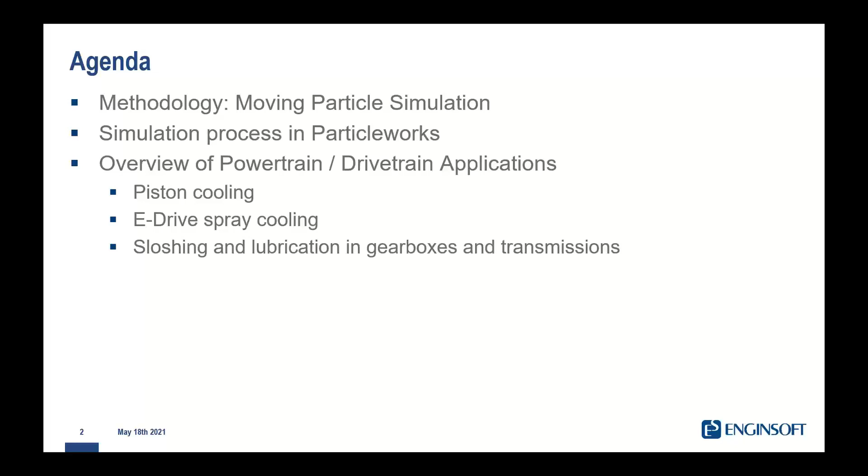I will take you through a brief technical introduction about the moving particle simulation. Then afterwards, how the simulation process in Particleworks is designed. So Particleworks is a commercial tool using the moving particle simulation. And then finally, before passing the word to Tobias Moll, I will give you an overview about some reference applications from the powertrain, or broader speaking, from the drivetrain sector, based on customer references that have been presented on other conferences before. So jumping into the first topic.

So the moving particle simulation was originally proposed in 1996 by Professor Koshizuka. Professor Koshizuka is a professor at the Graduate School of Engineering at the University of Tokyo, and also a co-founder of Prometech Software. So what is the MPS? Basically speaking, in one sentence, the MPS is a deterministic Lagrangian method to simulate liquids. But what does that specifically mean?

So starting from classical CFD methods, such as the finite volume method, the fluid is normally discretized on a numerical grid, where basically mass and momentum is exchanged between the different cells, and this concept is called an Eulerian approach. And then on the other hand, the basic idea of the moving particle simulation, instead of passing the mass and the momentum between the cells, is to discretize our fluid, our liquid, by a set of particles that interact with each other and also move.

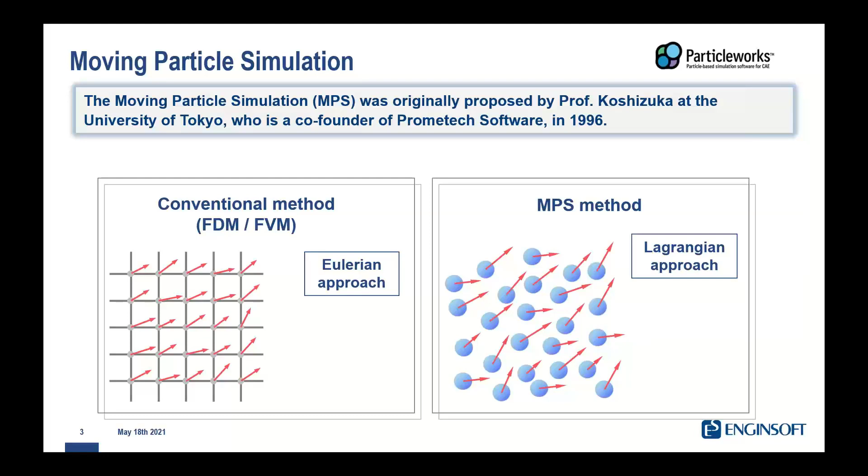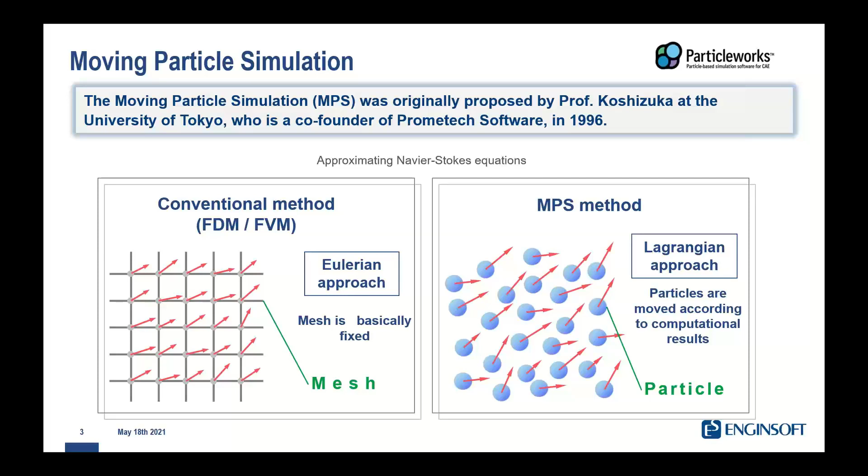So we can basically see them as dynamic calculation points that do not exchange mass, and this on the numerical side already makes life much easier. And the MPS also approximates the Navier-Stokes equations. So how to describe Particleworks, which is a commercially available tool by Prometech Software that uses the moving particle simulation. So Particleworks is a CFD software based on the MPS, and it solves the Navier-Stokes equations in incompressible condition.

So that means that it's mainly applicable to liquid flow simulation, and it's commonly used to simulate free surface flows, but also liquid jets. But it can also simulate granular material like powder and also rigid floating objects. And these two examples we see here are the oil splashing in a transmission, and also on the right-hand side, a bearing with grease, which means that in principle we can also simulate highly viscous, or in that case actually quasi-solid materials.

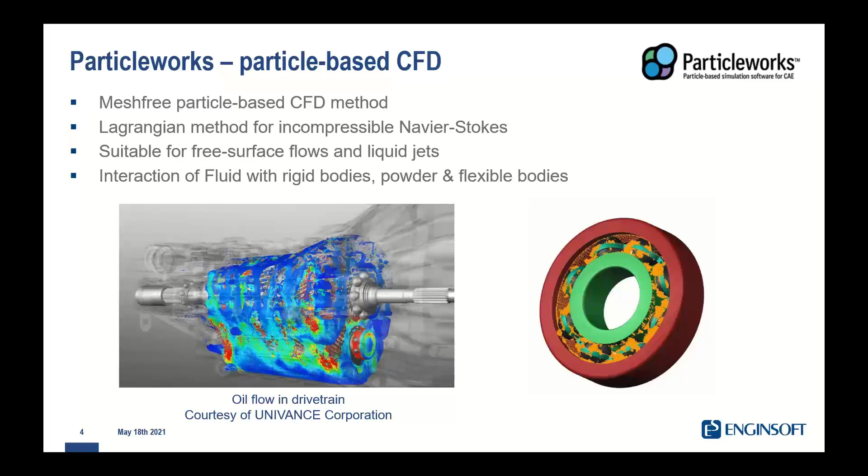So how does the general simulation process in Particleworks look like? It starts that we export our geometry data from CAD. In here, it's fine enough to just roughly group the different bodies based on the kinematic conditions that we want to implement later on in our simulation model. So for this two-speed reduction gearbox, we'd import the housing, the input shaft, the output shaft, and then one file per other rotating component, which in that case would be the different gears.

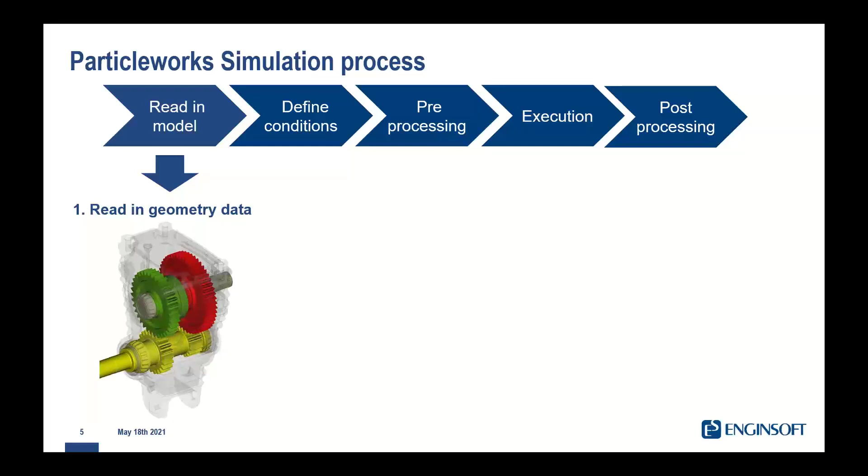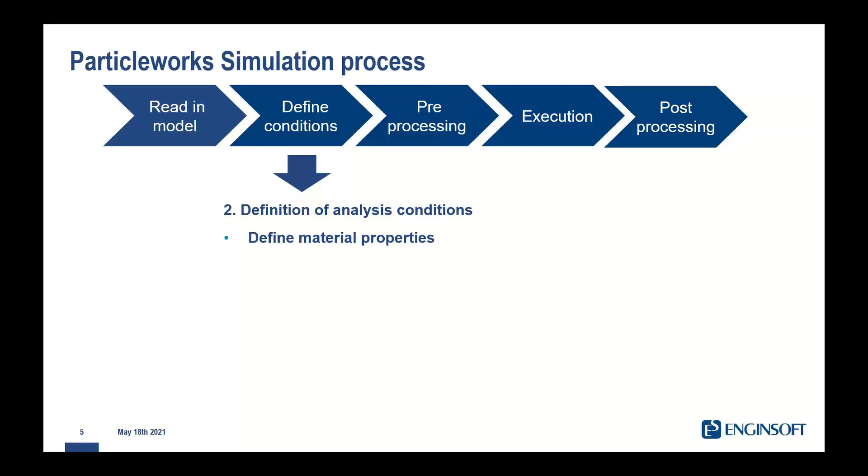Then after importing the model, we'd define the analysis conditions. So this starts with defining our material properties, specifically speaking, in that case, the oil properties being characterized by the density, viscosity, the surface tension, and all these kind of parameters that characterize our liquid. Then in the next step, we can predefine the kinematics of our system. So for the application of a gearbox, that would mean that we define the rotational velocities of the different shafts and gears.

And then in that step, last but not least, to introduce our liquid particles into the simulation, we could either use inflows and outflows, or if we have a pre-filled sump, for example, we can also use this sort of filling plane, which will pre-fill the sump based on the filling height or a predefined volume, and then also, of course, set some numerical parameters for the solver.

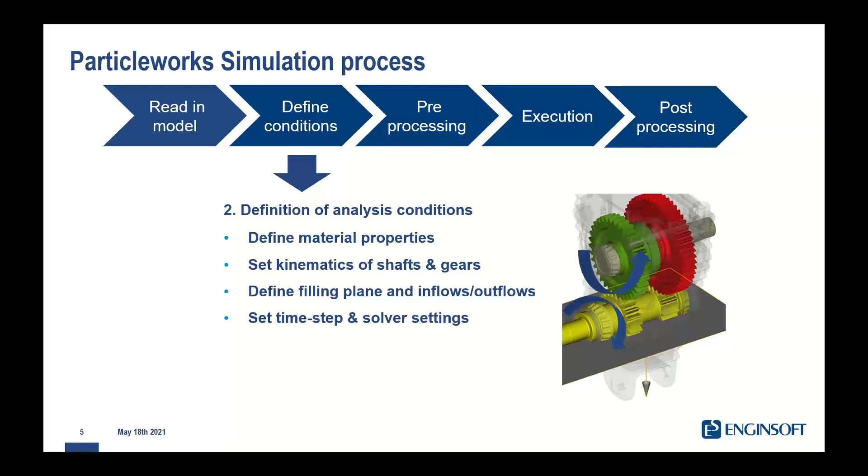Then transitioning to the pre-processing, this is a fully automated process in Particleworks, which in the end translates the geometry into the internal calculation model that the solver will actually use, but also produce our initial particle placement. So before running the actual simulation, we will already see the amount of fluid being filled into our system.

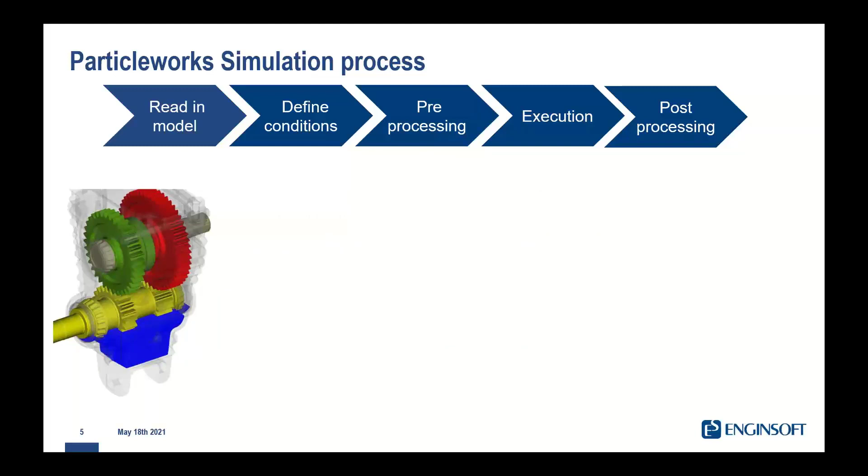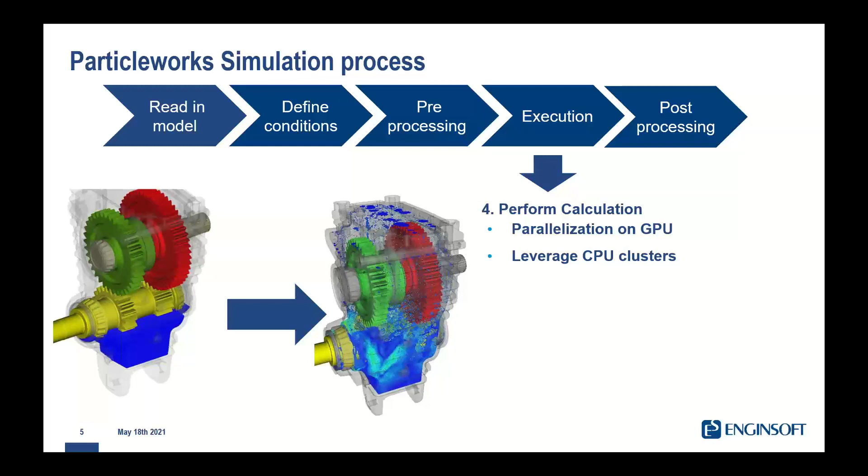Then during the actual calculation, we can leverage NVIDIA-based CUDA GPUs. So there is a GPU-based solver available, which makes a lot of sense for particle-based methods in general, but we can also leverage existing CPU clusters. And from the software point of view, both the user interface as well as the solver run on Windows and on Linux.

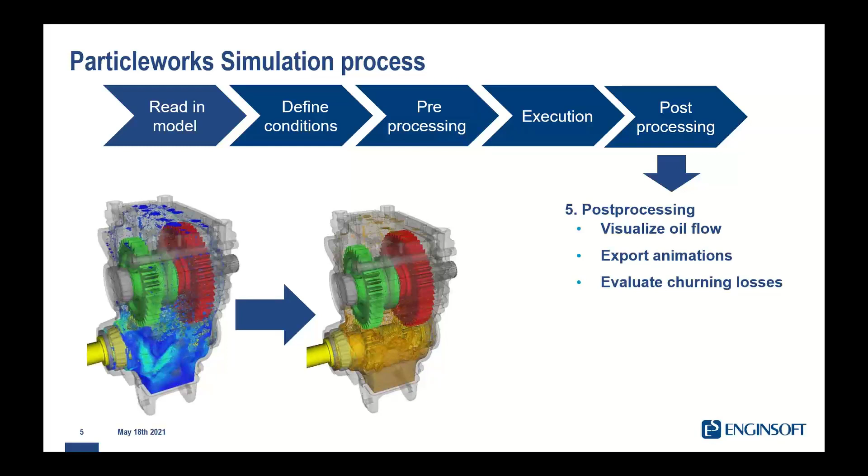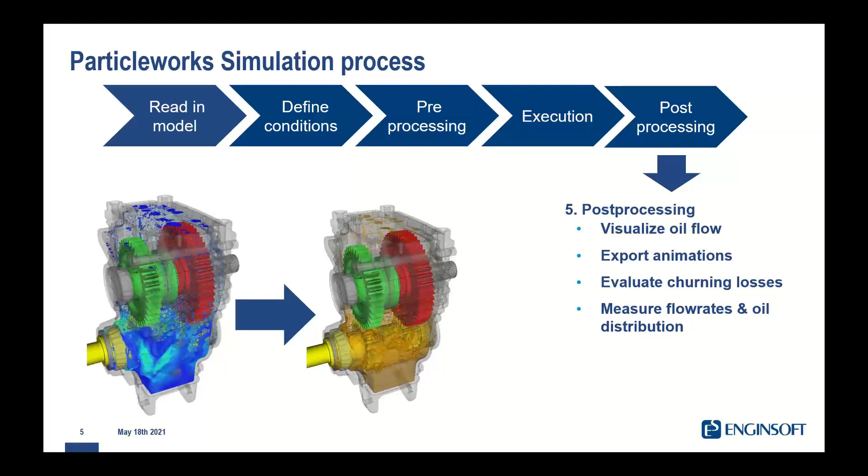And then transitioning to the last step, the post-processing. In there, of course, we can visualize the oil flow, we can export animations, as we will later see, evaluate the churning losses, but also perform virtual measurements, so to evaluate flow rates and also the oil distribution for different parts of our system.

So cut down, what's the advantage of the simulation process? Since meshing is being taken out of the equation in comparison to mesh-based CFD, this saves us a lot of time. Then the state-of-the-art GPU-based solver gives us a huge advantage. And in terms of simulation process robustness, it's also very easy to implement complex kinematics.

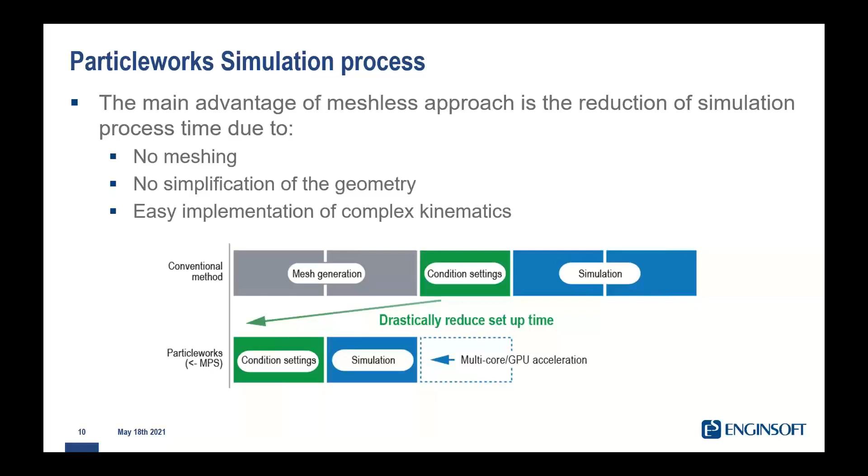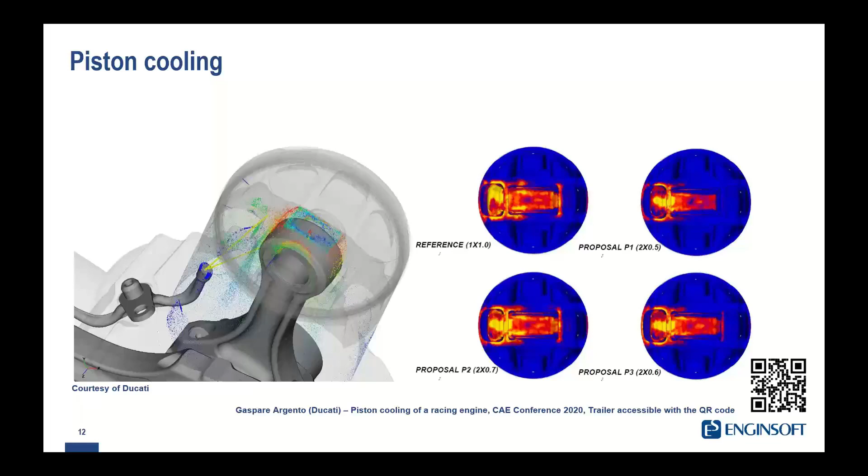So the first application I'd like to focus on is piston cooling. In here at the last CAE conference, we had a very nice presentation from Ducati Corse. The recording of that presentation is still available on the homepage of the CAE conference. And in there, Ducati presented their use case on how Particleworks helped them to evaluate and also optimize the effect of different nozzle designs for the spray pattern on the undercrown of the piston, and also evaluate and therefore optimize the HTC distribution on the undercrown of the piston.

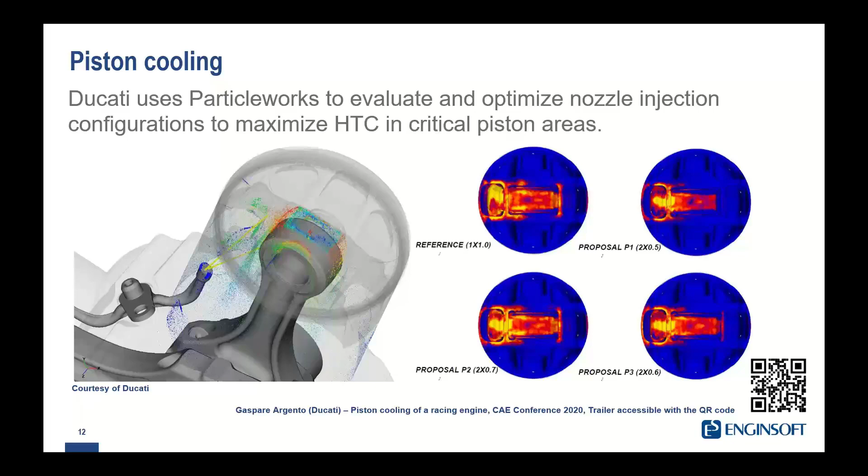Then another case study, which was presented in collaboration between EnginSoft and Ricardo, focused on the thermal effects of an electric motor. In there, the overall target of the application was to compare the results of simulations with experimental measurements, so temperature measurements from the test bench with simulated temperatures from an FE model.

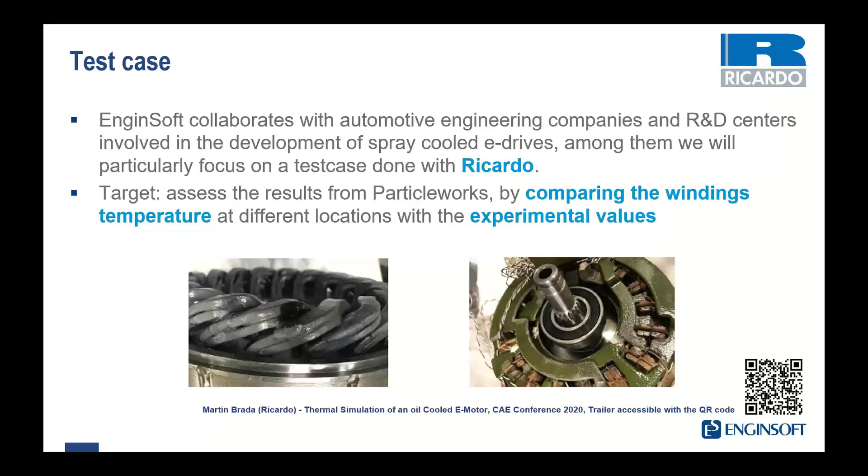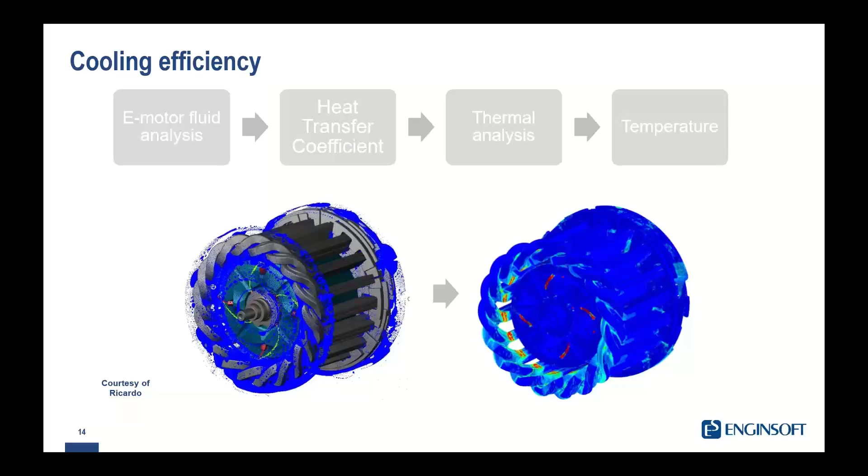And in there, Particleworks was used to simulate the windage, so the airflow inside of the e-motor, but then also the oil distribution and also the HTC distribution on the windings, which were then used in a later stage to calculate the temperature distribution in the windings. And finally, the temperatures were compared between the resulting temperatures from the simulations and from the measurements.

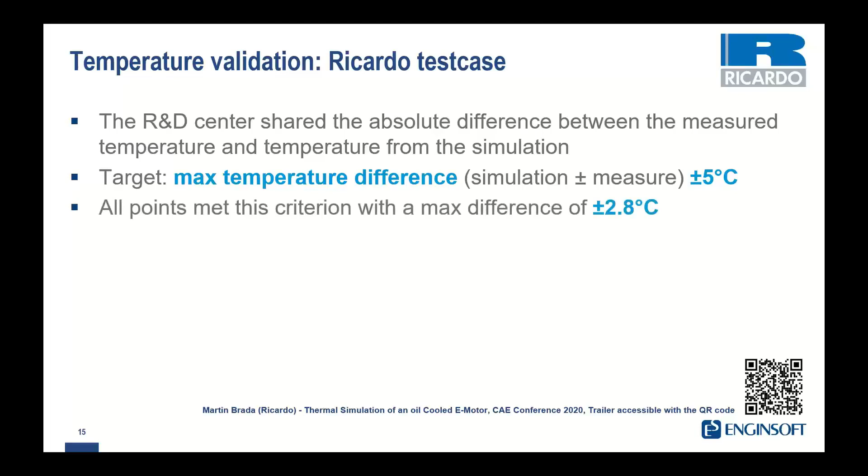In there, the overall requirement was to lie within a deviation of less than 5 degrees Celsius. And lastly, this criterion could be met with a difference of less than 3 degrees Celsius. And also here, the original talk is still available at the homepage of the CAE conference.

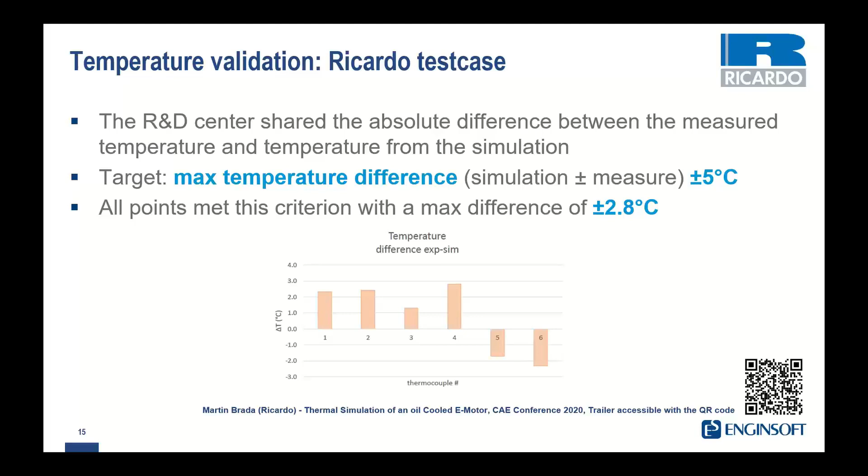Now, shifting a little bit more into the gearbox or transmission sector. It's one of the sectors where Particleworks is very broadly being used by major players. This case study that I'd like to briefly talk you through was presented at the CAE conference 2016 by Comer Industries. In here, we have a 2-speed reduction gearbox from a harvester machine, and the initial question was whether it is possible to have the model and the simulation done in roughly 3 days, which could be done in the end.

And in here, initially, the oil flow was validated based on these characteristic patterns that could be identified at the top of the housing. And then Particleworks was used to evaluate the lubrication, which was led by these internal channels to the bearings. And finally, this project could help to investigate the effect of the initial oil level onto the lubrication.

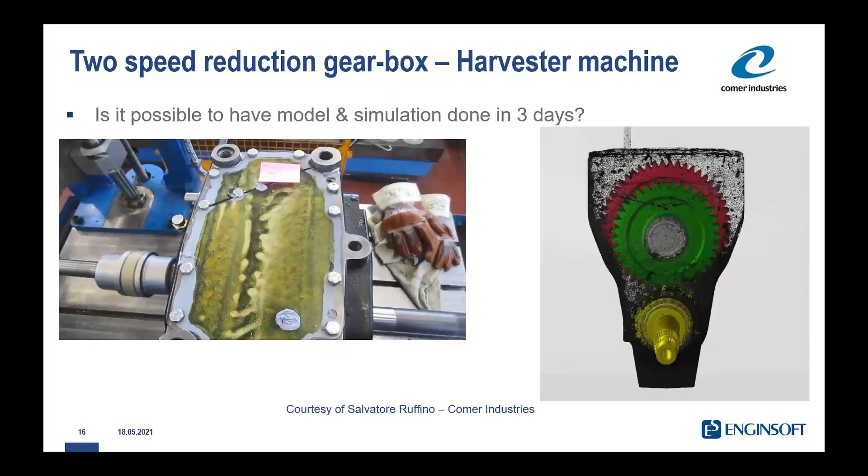Then another very interesting application from Hewland was regarding the positioning of the scavenge port. So in here, we could also simulate the circulation of oil inside of a transmission and also see the sloshing behavior in the transmission due to dynamic driving conditions, and therefore also validate that the pump intake is always well fed with oil.

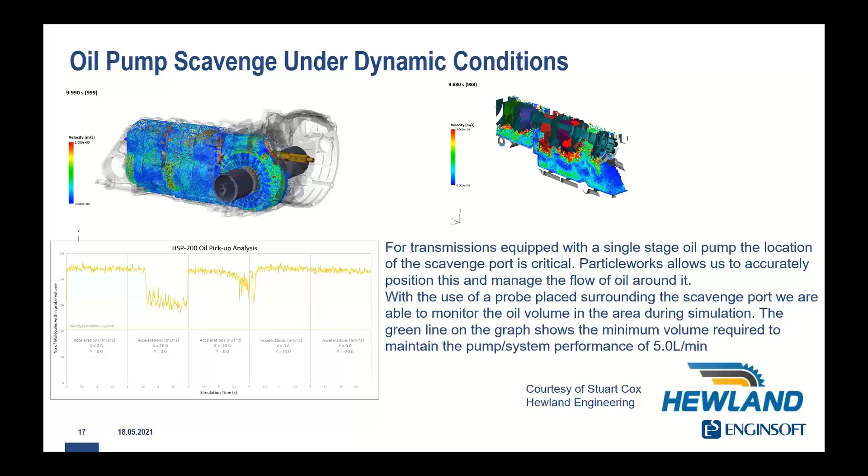We cannot hear you anymore. Your audio is off. Oh, sorry. There you go. Now you're back. Okay, yes. Sorry. Welcome from my side. I was muted, unfortunately. Now I would like to show some application of the software Particleworks.

And first of all, I would like to begin with a brief introduction of the Institute for Combustion Engines at RWTH Aachen University, where I work. So the structure of the institute: we have one director, that is Professor Stefan Pischinger. We have a junior professor, Professor Jakob Andert. He is Professor for Mechatronic Systems for ICE. We have 3 chief engineers and overall a bit more than 300 employees, which distribute almost equally to scientific employees, non-scientific employees, and student workers.

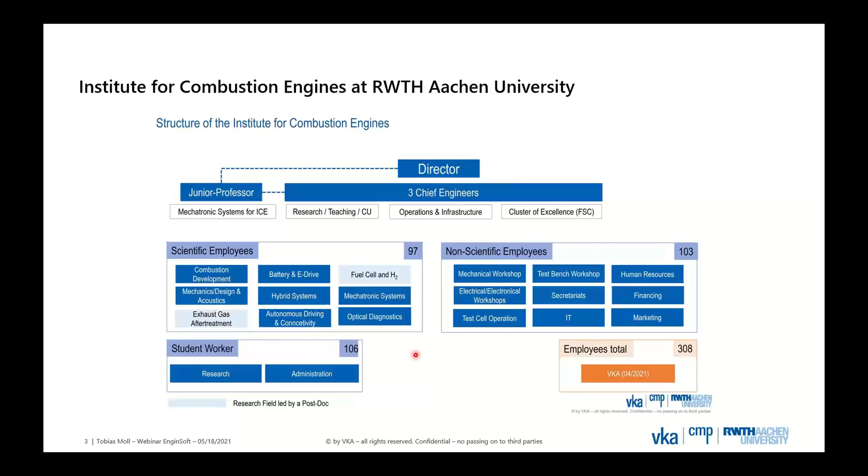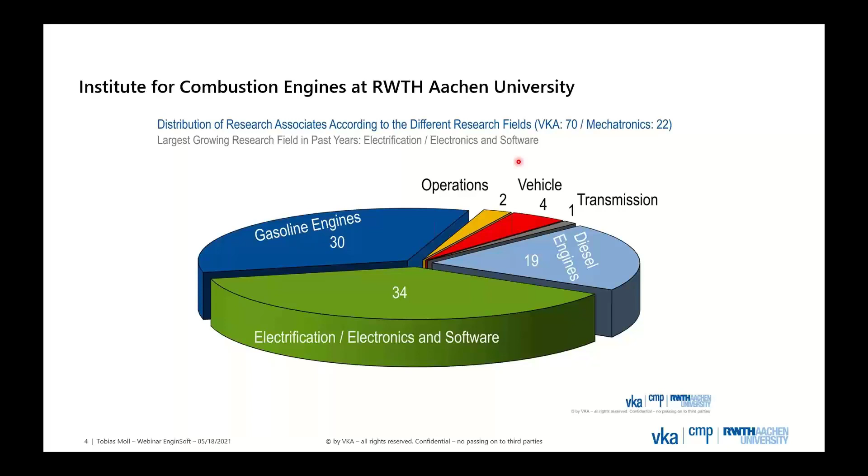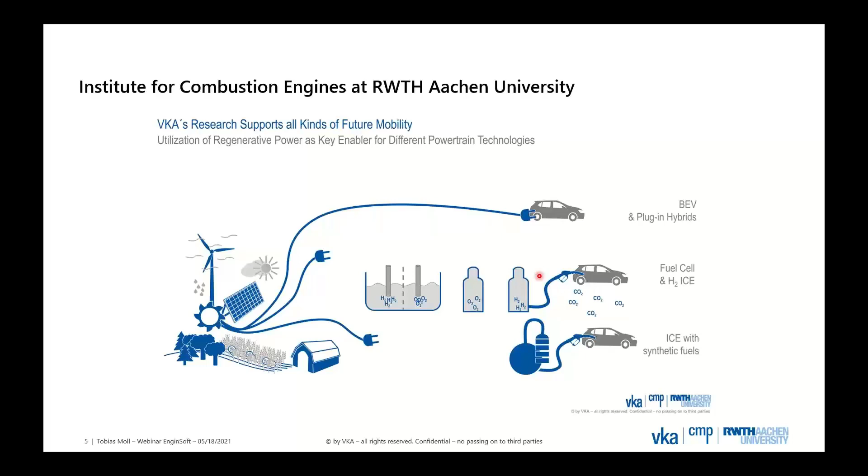So that was the introduction to the Institute, and now I want to give the background and the overview of the internal research project for transmission losses. So the research project, which is actually my PhD work, is about a co-simulation of efficiency, lubrication, and heat management for transmissions with integrated electric machine. So this is an exemplary setup of a co-simulation, in this case for a hybridized dual clutch transmission.

So the idea is to have one model, in this case I use GT Suite, where I have a thermal network of the transmission and also one longitudinal dynamics model included. And I have one model for the simulation of the transmission losses. This I do in MATLAB Simulink. And you see here on the left side, in this transmission, we have an oil sump. You see in yellow, orange here, the oil volume flow. We have an oil sump and an oil pump, oil cooler. And with this oil pump, oil is pumped to an electric machine, which is integrated, to cool the electric machine.

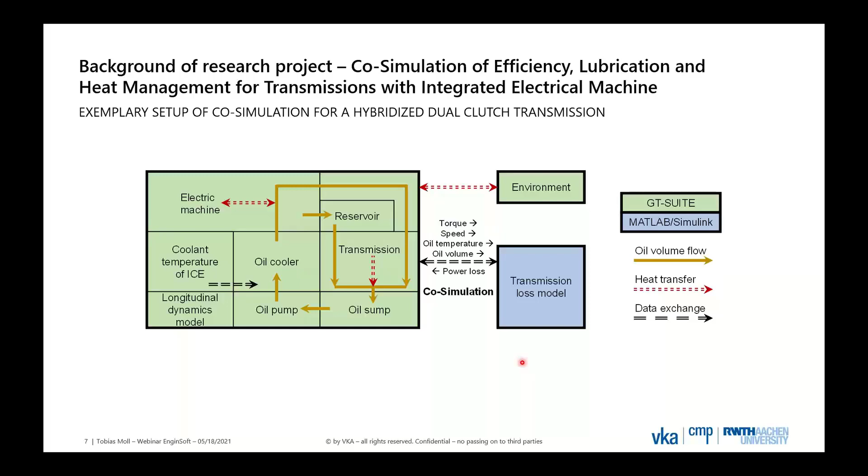And of course, it's important to simulate the losses as accurately as possible. And because of that, we did an internal project to validate the MATLAB Simulink model. This internal research project was done at FEV Europe GmbH. The Institute for Combustion Engines has a research cooperation with FEV.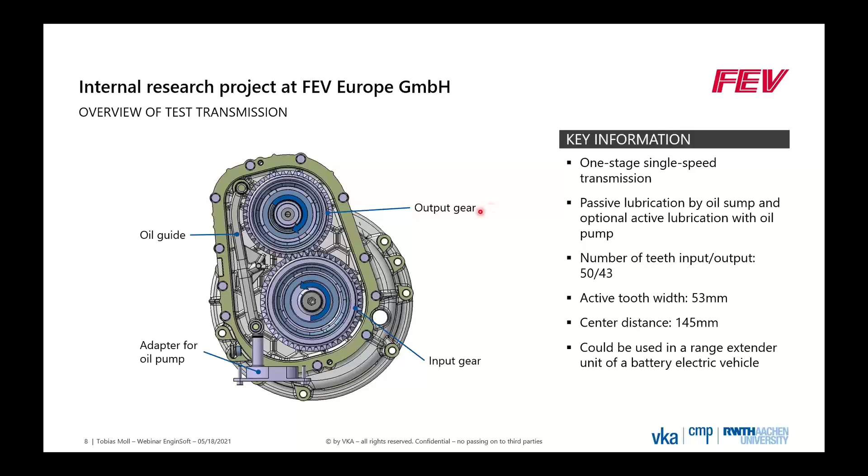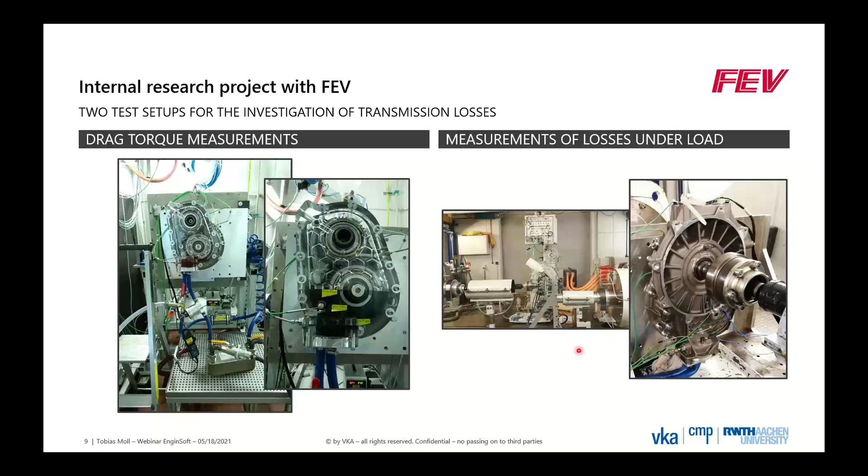And here on the right side, you see the other test setup for the measurements of losses under load. So with the full aluminum housing, and 2 e-machines, one at the input, one at the output. There we also measured the torques and could calculate efficiencies. Now here you see it a little bit larger.

So we investigated 3 different oil levels for these drag torque measurements. The low oil level, where just one tooth head is dipped into the oil. Then a medium oil level, where the bearing is just dipped into the oil, and the higher oil level, where we go up to the axis of the lower gear. Furthermore, we investigated 3 different oils, 3 different viscosities. But I will come to that later.

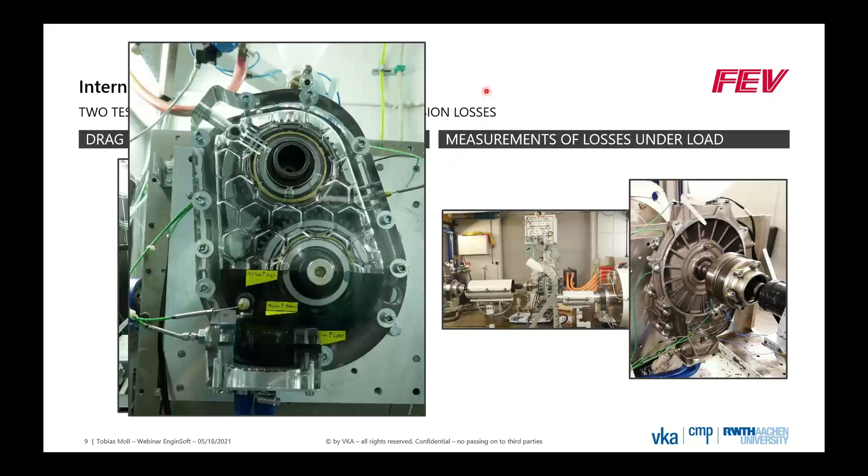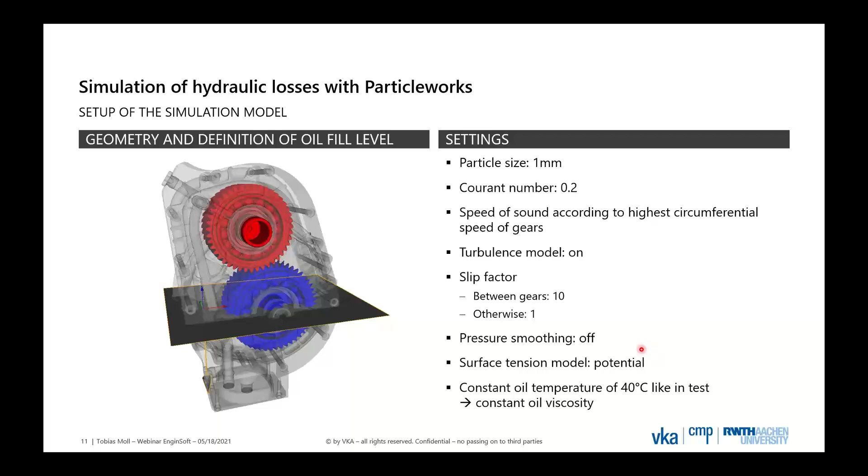For the slip factor, I used a value of 10 between the gears, and otherwise, between oil and housing, I used a slip factor of 1. With this slip factor, I saw better results, and I could simulate the squeezing losses more accurately. The pressure smoothing was switched off. The surface tension model was potential, and as I said, a constant oil temperature of 40 degrees, like in the test. So also in the simulation, a constant oil viscosity.

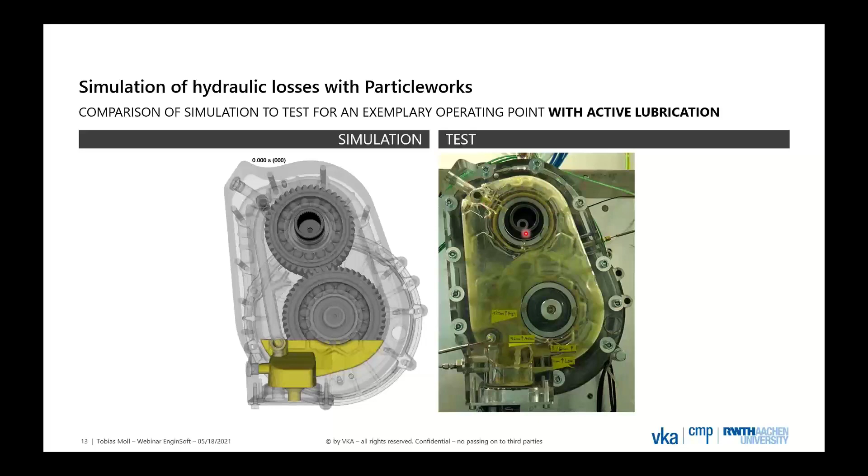Even though it may not look so compared to the other picture, without active lubrication we only have some oil mist around the bearing. But here with active lubrication, we really have an oil film in this region. Here you see the video from the test to show you the dynamic of this.

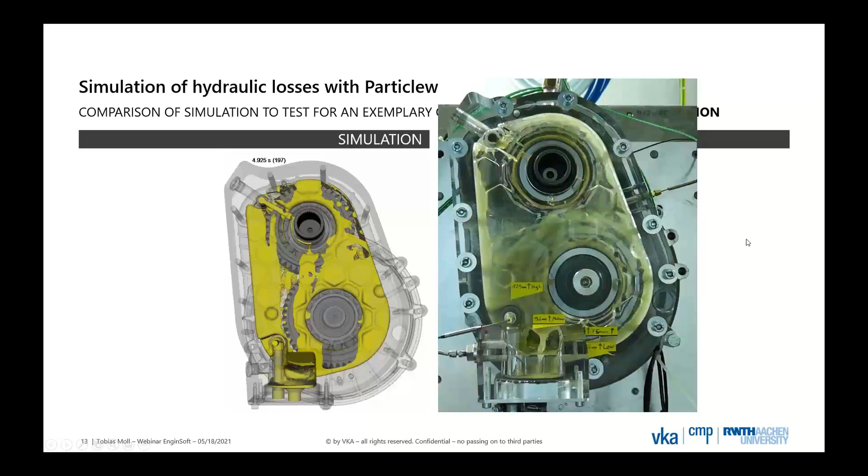I know it works. So you can see some seconds of this test. Even in the stationary state, there's a lot happening. There's always movement, so it's not a constant oil flow. There's always some action inside this transmission. And this is only for 1000 RPM. For the higher speeds, of course, you see oil almost everywhere. But still nice to see.

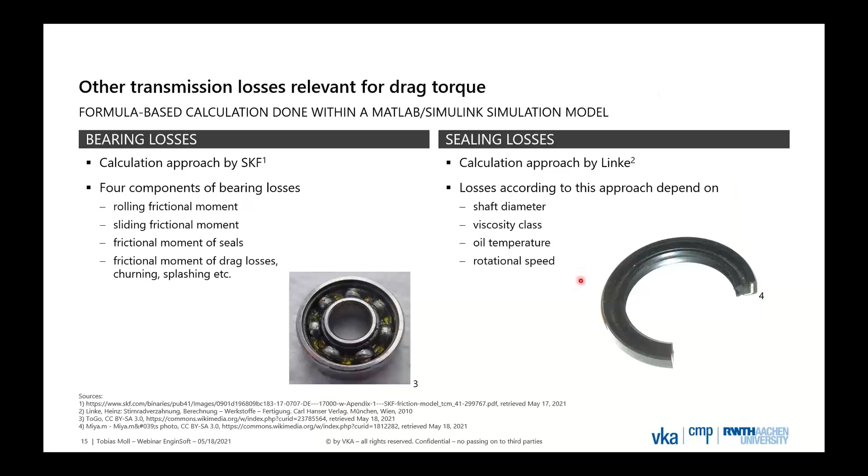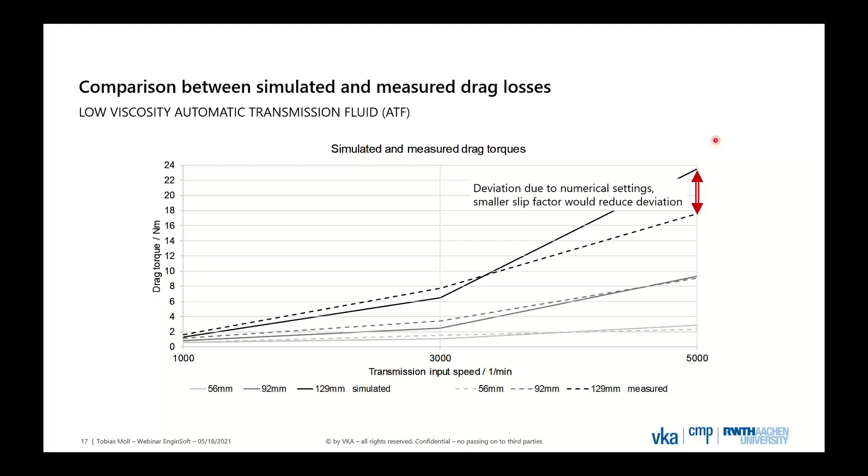But for these investigations, I kept this as a constant value. So that could be improved in this case with the experience that you gain, for example, in a test.

Here you can see the relative deviations of simulated to measured drag torques. On the horizontal axis, we have the speed and the oil level, and on the vertical axis, the deviation. You see that in most of the areas we are below 20% deviation, and in the remaining areas, still between 20 and 40%.

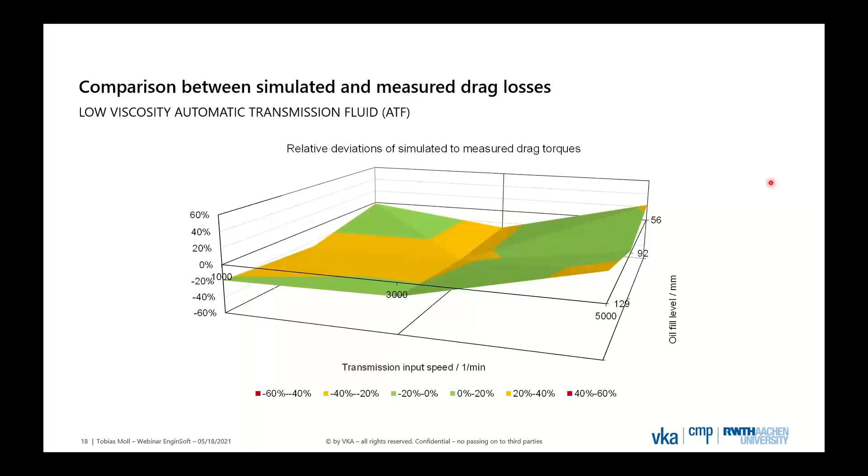So on this slide, you see, as an example, how the single losses distribute. For this ATF oil, we have here the values for the low oil level and 1000 RPM. The left bar is always for the tests and right for the simulation. You see, quite good result. And the biggest part of these losses actually come from the sealing losses, at least according to the simulation.

So when we go to a higher speed and keep the oil level at the low oil level, we see the sealing losses here in green do not change. So what changes is mainly the hydraulic losses, and the bearing losses actually reduce quite a little bit.

And the third example, where we also have a very good simulation result compared to the test. So we increase the oil level to the medium oil level. So the hydraulic losses really increase very much. Also the sealing losses, they are not influenced by the oil level, and bearing losses also increase due to splashing losses.

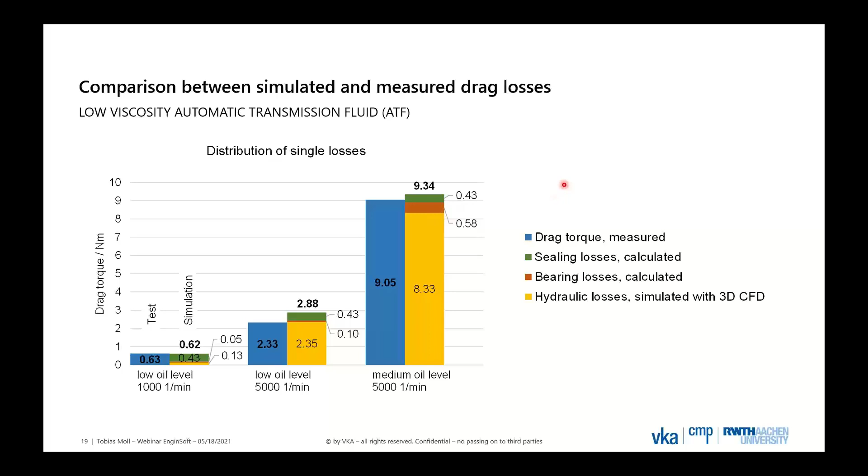So then we have the medium viscosity that has been investigated. This was a 75W-80 transmission oil. The same representation as before. Here it's a bit different. Here we underestimate the measured losses in our simulation for this operating point at 5000 RPM and the high oil level. But this can be explained by the oil aeration, which was also noticeable in the test. This leads to an increased viscosity, but the oil aeration was not considered in this simulation.

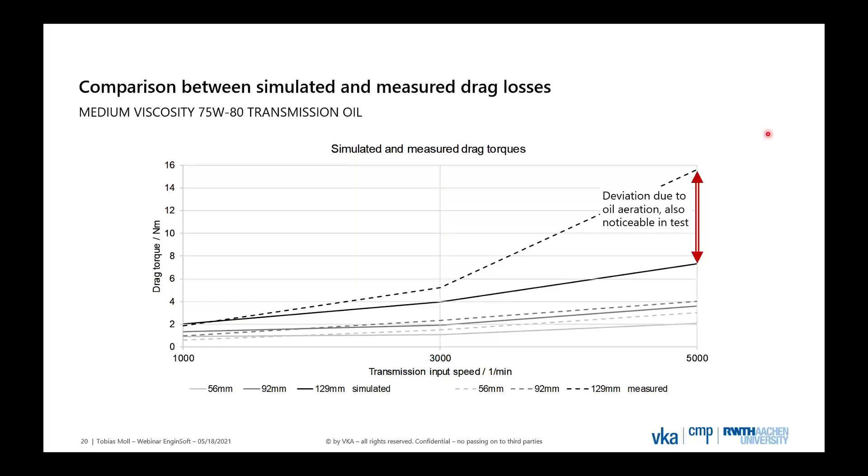So also here we have in many operating points deviations between 0 and 20, respectively -20%. I see this deviation here at the 5,000 RPM and high oil level, which I just explained, and some deviation coming to a low oil level and low speed, which could be explained by the sealing losses, which are maybe simulated or calculated too high.

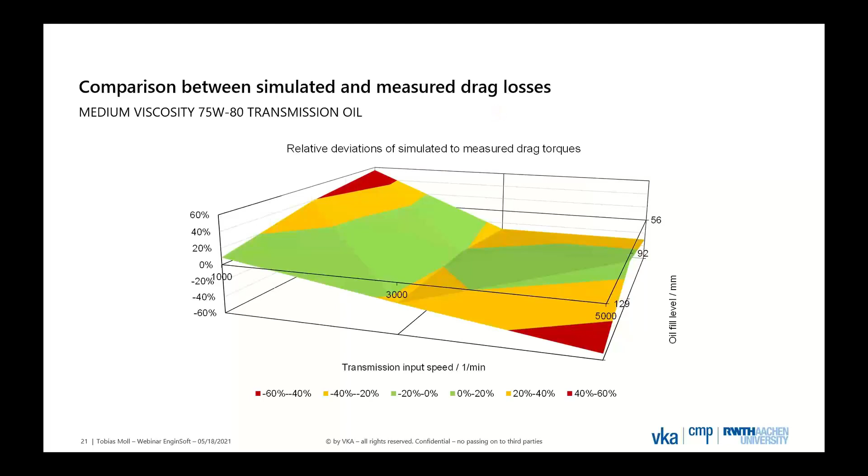And the third example, the high viscosity oil is 140W-80 transmission oil, where we can also see a good match between simulation and test. So interestingly, with increasing viscosity, the drag torques reduce for this transmission. But you see here again, we underestimate the losses compared to the test, but here we have quite small deviation.

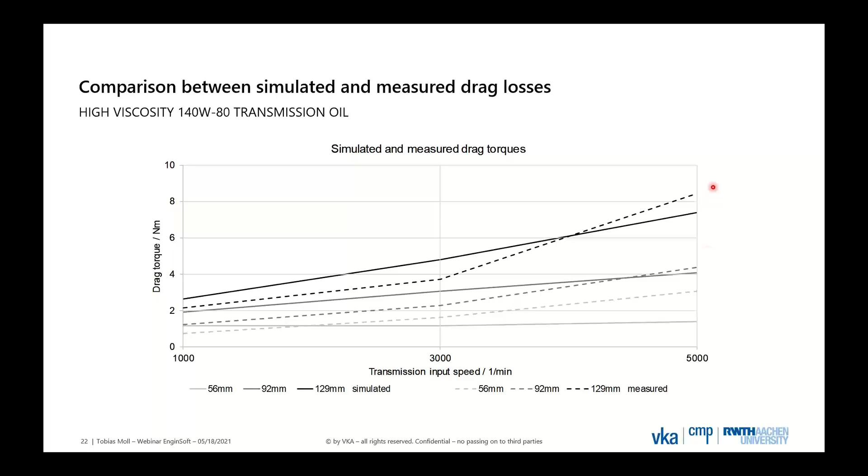So here the same, the relative deviations, where you can see, especially at the low RPM, the deviations which go up to 60%, but this can be most probably explained by the losses of the seals.

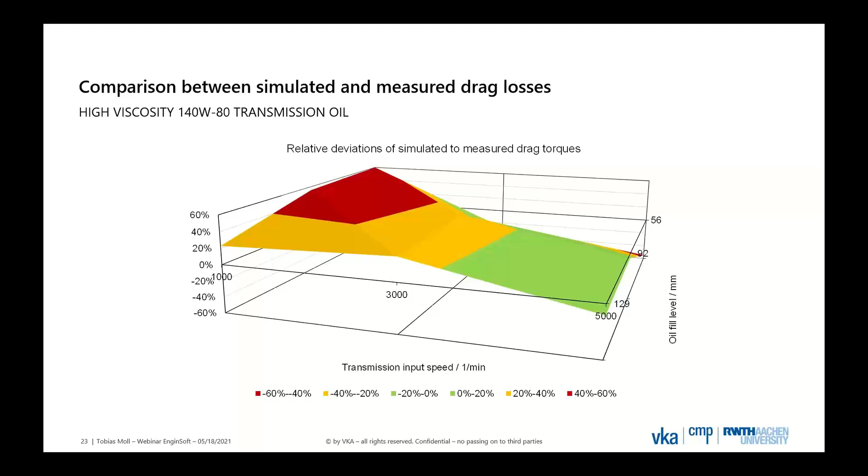So now I come to the summary and to the conclusions. So in general, we have a very good match between simulation and test, even with the same numerical settings for simulation with different oils. As I mentioned, I kept this slip factor constant. When you have experience with a certain transmission and a certain oil, you can of course optimize this, and then for similar applications you can adapt the slip factor. But I wanted to keep it constant because I did not have the experience in advance, and even with that, we have very good results.

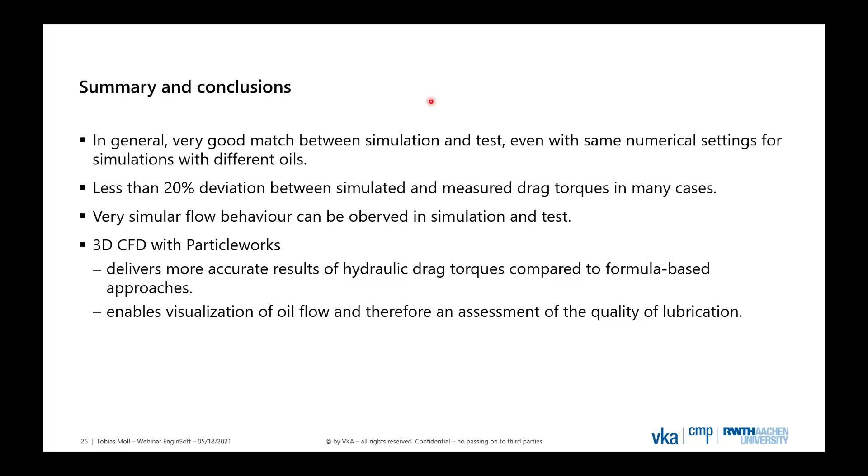So as I mentioned, less than 20% deviation in many cases. We can observe a very similar flow behavior in simulation and test. And the 3D CFD with Particleworks delivers more accurate results of the hydraulic drag torques compared to formula-based approaches, which I also use in my MATLAB Simulink model. But these formula-based approaches are of course not so flexible. And a big advantage is that 3D CFD enables the visualization of the oil flow and therefore an assessment of the quality of lubrication, which obviously is not possible with formula-based calculations.